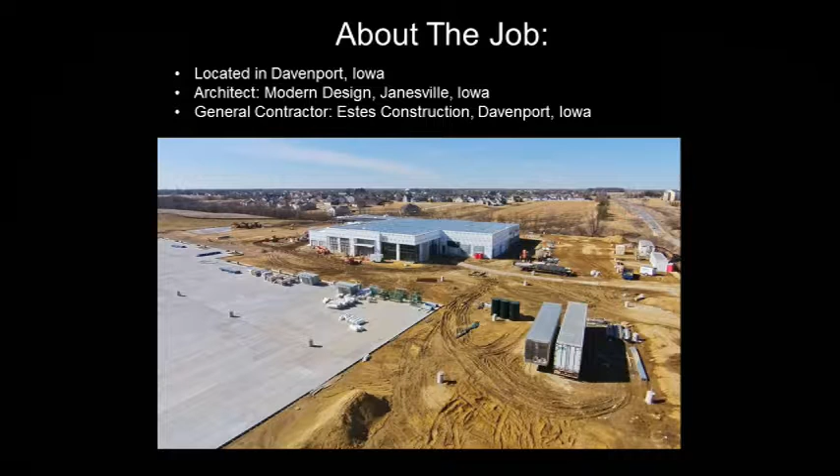A little bit about the project at hand. Mills Chevrolet, located in Davenport, Iowa, is a new development area. The architect was Modern Design out of Janesville, Iowa, and the general contractor was Estes Construction, located in Davenport. The building overall cost was roughly $12 million.

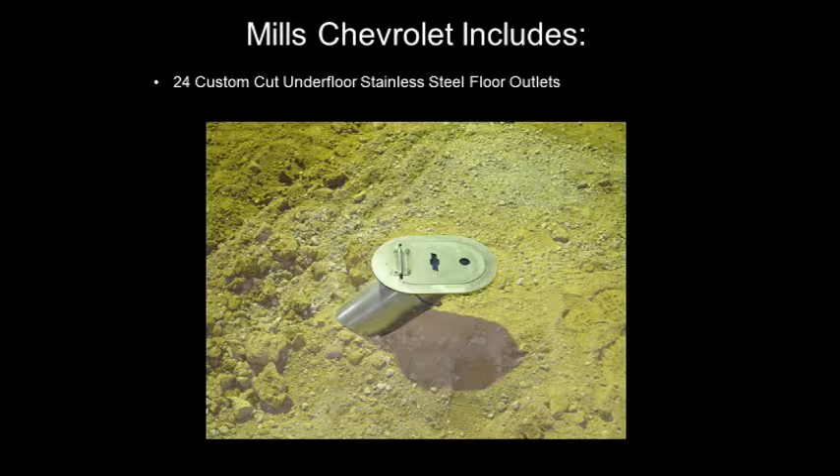Total square feet of 57,000 square feet, as well as 24 lift bays in the service department. Mills Chevrolet included 24 custom underfloor stainless steel floor outlets. Each floor outlet had a Chevy bow tie laser cut in at the owner's preference.

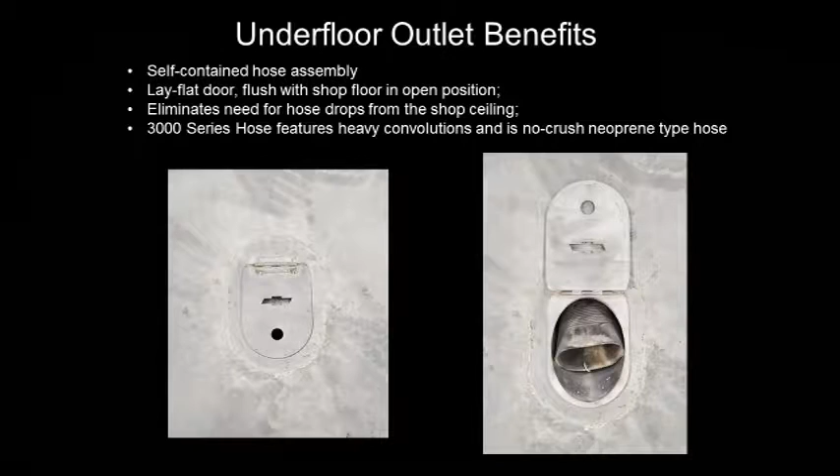Some benefits of an underfloor outlet are that they self-contain the hose under the floor. The door, which holds the floor outlet, while open, is flush with the floor. This eliminates any need for hoses hanging from a ceiling, while also utilizing Series 3000 hose. A no-crush hose can be run over by a vehicle and it'll retain its shape.

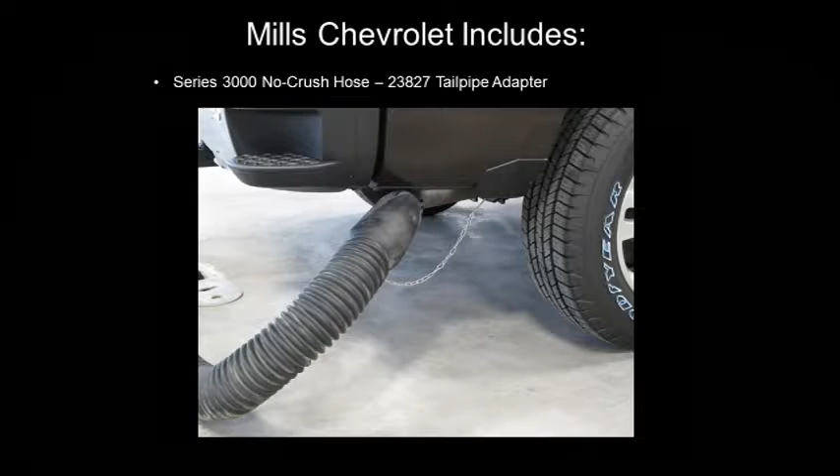Also included is the 23827 tailpipe adapter, which is a neoprene rubber adapter with a chain hook that connects it to the vehicle to keep it in place. There is a hose guide in each saddle that helps assist the user slide the hose in and out of the floor. The 24 floor outlets were divided into two sections, with a BI 165 handling the majority and a BI 135 handling the others.

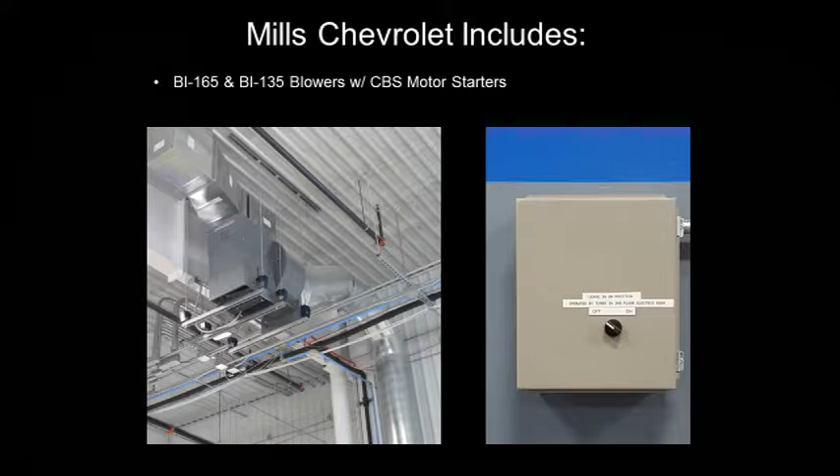Our BI series blowers are backward inclined blowers, and each blower was controlled by a CBS starter box, also provided by Monoxivent. This particular job included a time clock run system that was provided by the engineer, so the fans were utilized and ran only during operation hours.

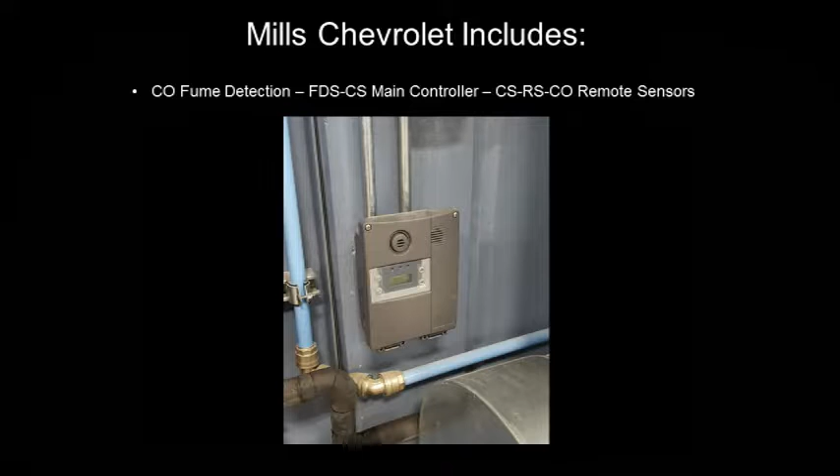Also included, we had our CO fume detection with an FDS-CS main controller and 6 remote CO sensors. A main control panel can handle up to 96 remote sensors. Under the floor, Monoxivent utilized our underduct VE corrosion resistant underground ductwork. Each joint was connected through our dry joint internal sleeve.

Next, we will have a video that shows the time lapse of ductwork being installed, as well as a little instruction on how the dry joint procedure works.

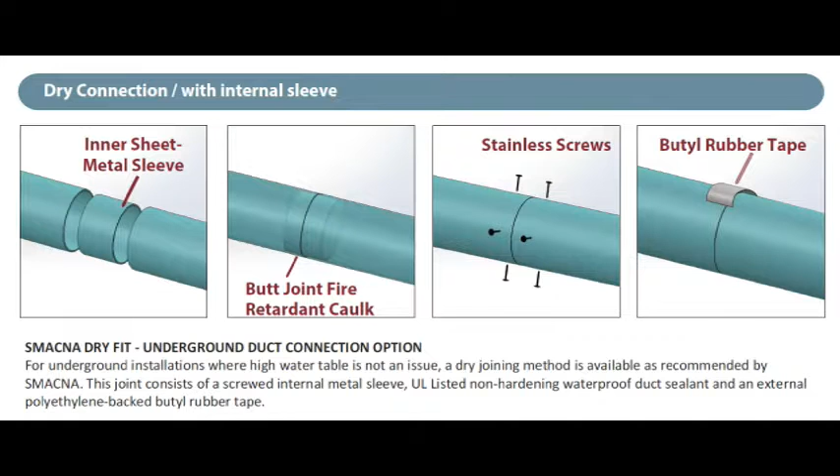For below-grade installations where high water tables are not an issue, Monoxivent offers a dry joining method, as recommended by SMACNA. The joint is created by first installing one half of a metal or fiberglass sleeve into one side of the duct run. That sleeve will be secured by screwing self-tapping stainless screws into the fiberglass end sleeve. The screws should be no more than 3 inches away from the end of the duct. A minimum of 3 screws should be used per side.

Next, the mating length of duct should be aligned and slid over the exposed half of the sleeve. Stainless screws should then be turned into the duct and sleeve assembly. Again, a minimum of 3 screws should be used. The joint should be wiped clean, and a water-resistant UL-listed fire retardant sealant shall be used to fill any cracks in the joint exterior.

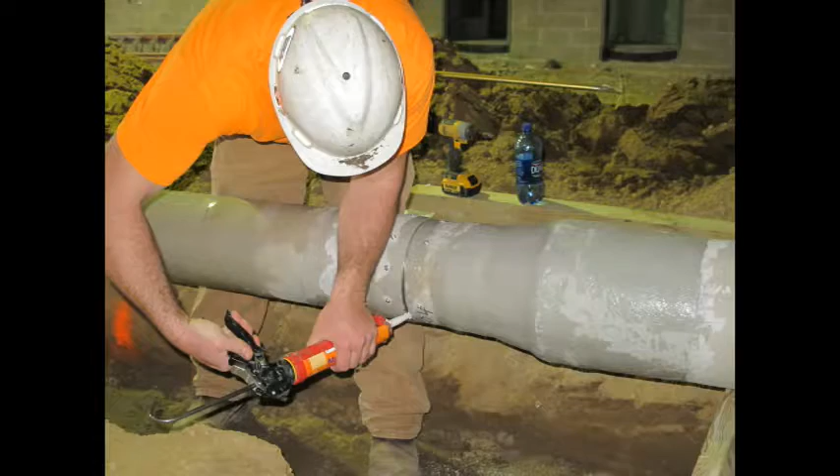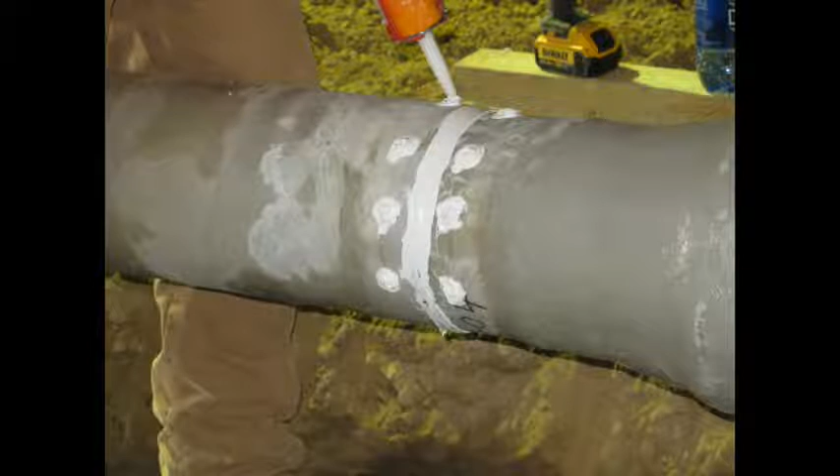Once the sealant is applied, make sure it is smoothed out to assure joint coverage, as well as keeping a flat, low-profile joint. The screw heads will also need to be covered and smoothed out. To complete the joint, a factory-supplied polyethylene-backed butyl rubber tape will be used to cover and protect the joint from any moisture penetration. Screws as well as the joint itself will be covered for complete and total sealing.

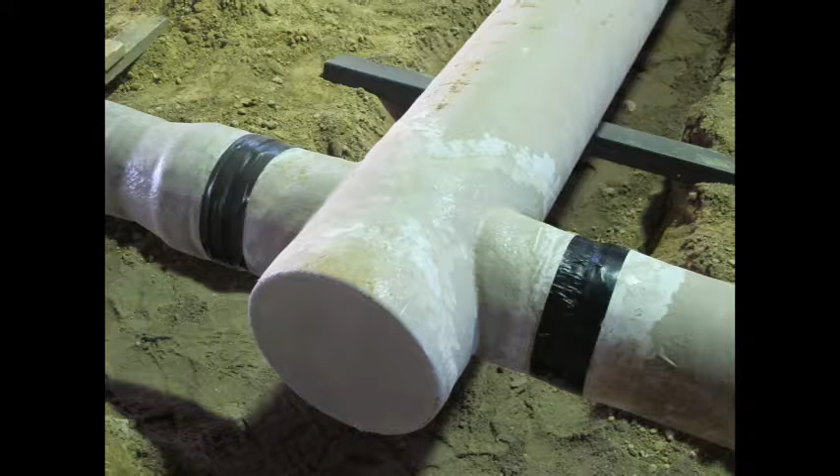This method of joining provides any contractor or installer a fast, efficient, and field-proven way to economically do joints without excessive labor costs or special training.

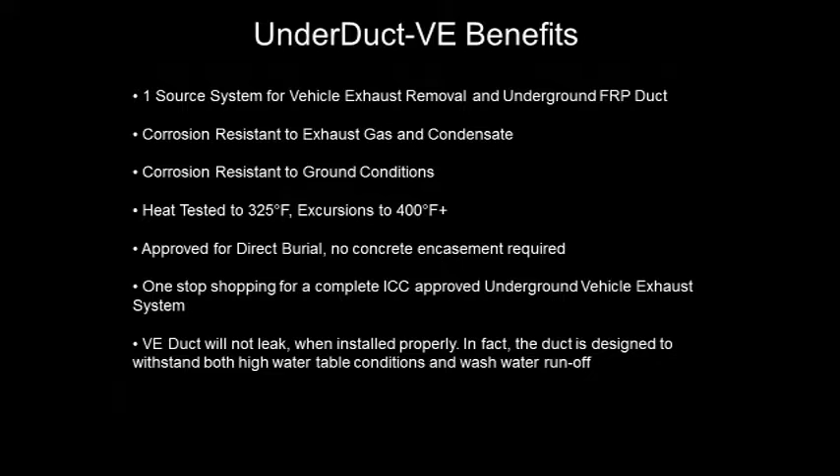www.fiberglass-duct.com. Some benefits for the UnderDuct VE: it being a corrosion resistant duct, it is not susceptible to salt breaking down and corroding through the duct. Also, the duct work is heat tested to 325 degrees. It is approved for direct burial and no concrete encasement required. It is a one-stop shopping for a complete ICC approved underground vehicle exhaust system, as well as the duct will not leak when properly installed.

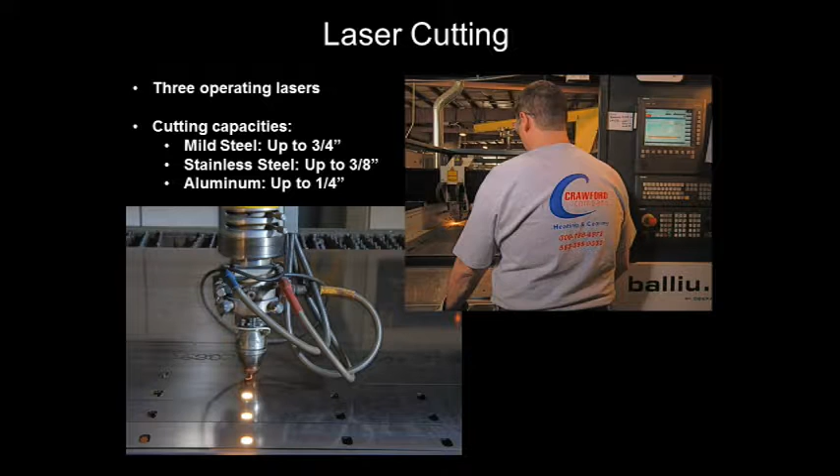As mentioned before, we custom cut the Chevy bow tie into each floor outlet. Monoxivent has 3 engineers on staff who work daily in SolidWorks that can provide a lot of custom capabilities through most of our products. Monoxivent is a division of Crawford Company. Another division of Crawford is our laser cutting division, where we have 3 operating lasers that can cut mild steel up to 3/4 of an inch, stainless steel up to 3/8 of an inch, as well as aluminum up to 1/4 inch.

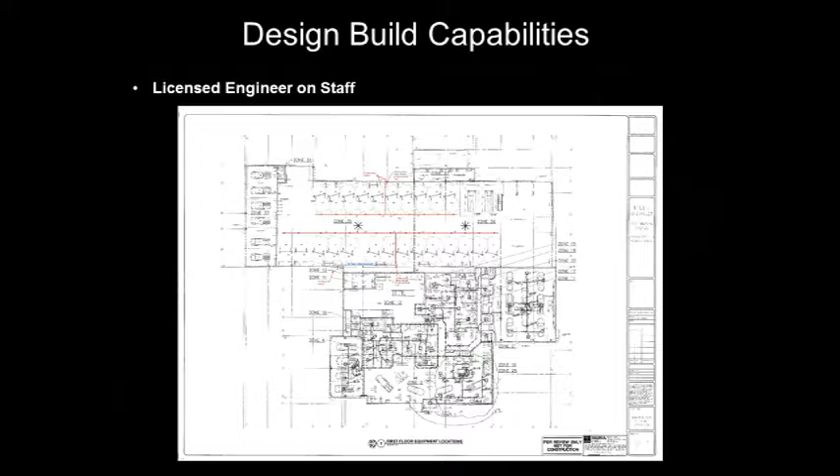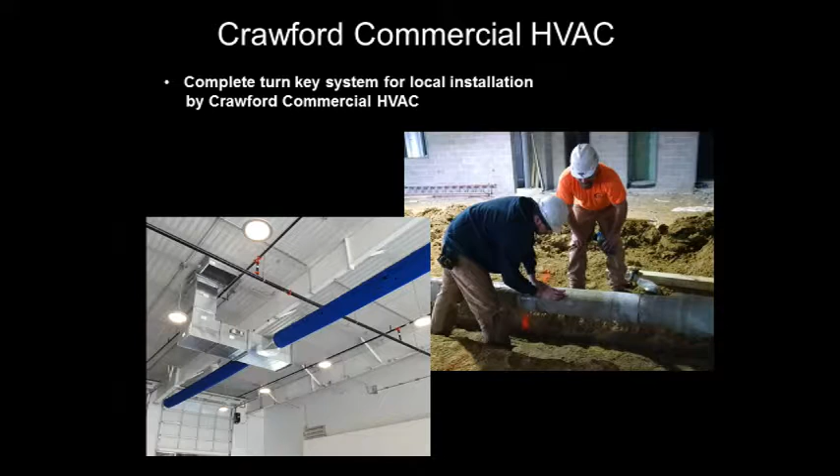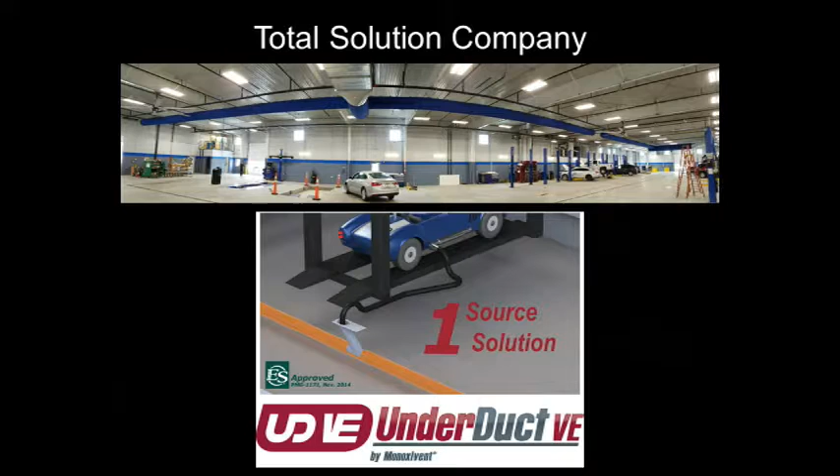Newly added to Monoxivent's team, we have a licensed engineer on staff that assists us with our design build capabilities for Crawford Company and Monoxivent together. Crawford Company Commercial HVAC was the installer of both the vehicle exhaust system as well as all the HVAC at Mills Chevrolet, which in turn makes us a total solution company that provides all of the vehicle exhaust as well as all of the HVAC product provided to Mills Chevrolet.